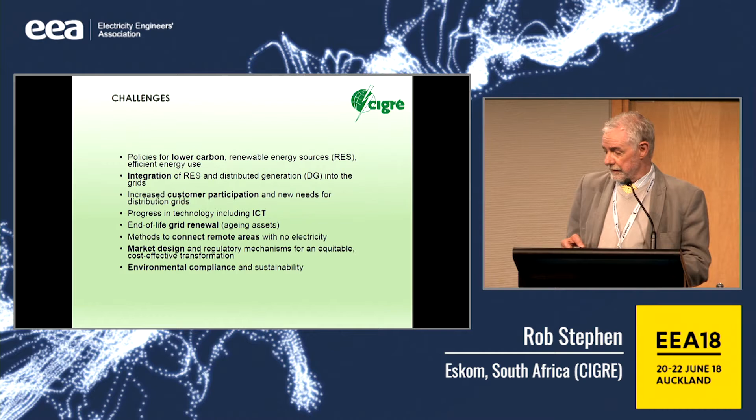And then, of course, market design, which now starts affecting your entire operation of the network, and then your environmental compliance. So, the purpose of the power system: high reliability, security of supply, most economic and best environmental protection. And of course, none of those really go in sync with each other. They're always competing. And this is one of the big challenges, of course, being an engineer, to try and balance all of these together.

There was a study done on what grid models are going to go forward. If you remember, some years back, when renewables were started, they said you don't need transmission lines ever again, because everything's going to be just on your roof, and you're going to be totally off grid. What they found was virtually exactly the opposite, because when you get grid-scale renewable generation, it's normally placed in areas where there's no lines, there's no load, there's nothing. So you then have to have lines coming from there into the load centers.

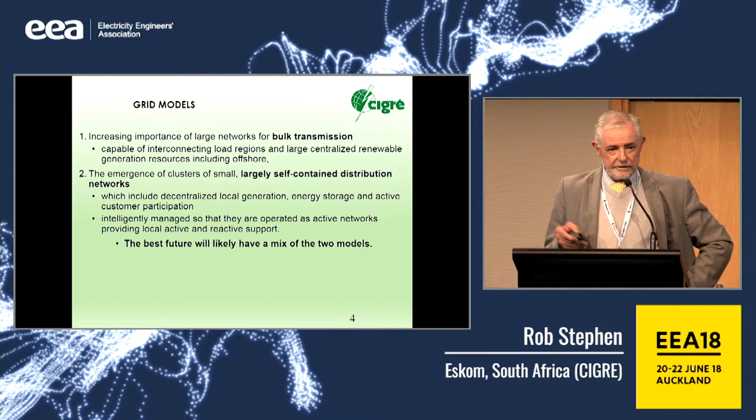So they actually realized that we're still going to need large networks with bulk transmission, but there's also this cluster of small distribution networks, the microgrids. The microgrids can be standalone or they can be part of the grid, with a combination of various levels between how much integration or not. So the finding was that you can't ignore one or the other. You actually have to look at a mix of these two models of grids.

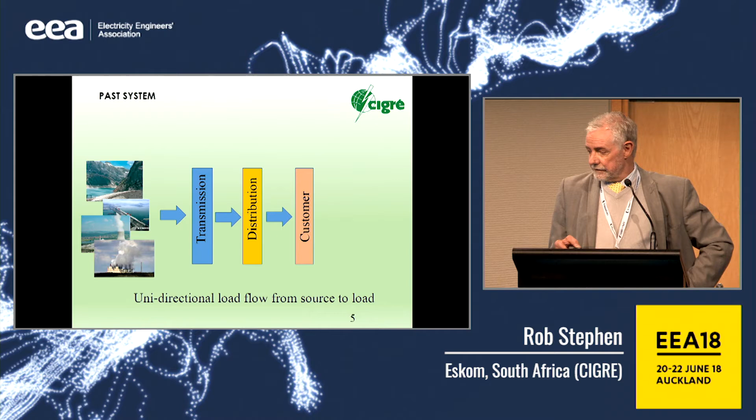So this is really your past system, and in fact most of the world is still operating in this mode to a large extent. But this is really where your evolution comes in, where you've got generation at any point, at any voltage, and power flow in any direction at any time, at any voltage. So now you can have MV feeding back through to your transmission network, and this has been found in Germany with a large rooftop PV program, that you're getting back feeds through the transmission transformer. So now all your tappings, whereas a transformer tap for transmission was normally going only in one direction, now you have to see have you got voltage problems going in the other direction, the power flows in the other direction. It was never really planned for that.

What they've identified in CIGRE is 10 areas which need to be focused on simultaneously, and each of these areas really is integrated, one affects the other.

Your active distribution networks really is what you might term your smart grid. But that leads to, with your smart meters, a massive exchange of information, your big data management. Often big data is actually worse than small data because it's just too much and you make absolutely no use of any of it. The importance of how to actually manage the data, who owns it, who uses it, and what analytics you want to get out of it is extremely important to decide up front.

Then your integration of HVDC and power electronics, with the cost of the inverters coming down, your voltage source converters, your HVDC up to 2000 MVA now, voltage source converters, they've now got a DC breaker as well, they claim, so you can get DC grids, and of course MV and LV DC, which we're looking at.

Then installation of storage, and then the one thing I'll touch a little bit more on is operation and control, and then your protection, of course, and that's your varying fault levels and the need now for wide area protection systems and automated changes of relay settings.

And then new concepts in planning. Planning used to be fairly complex, now it's ridiculously stochastic, so it's almost you don't know where the load is varying, and it changes from a load to a generator. And then, of course, in managing that, you need new tools.

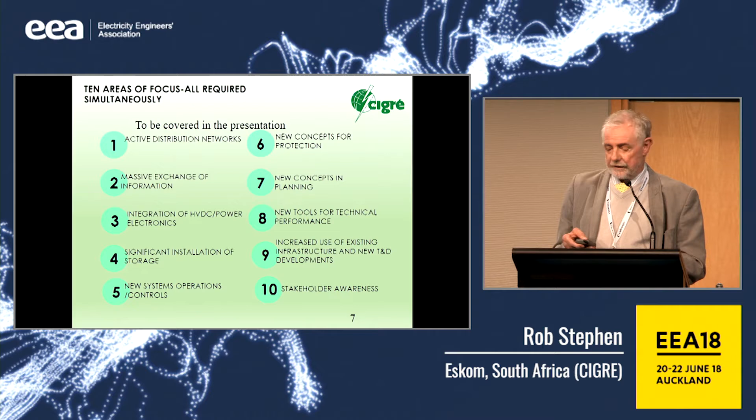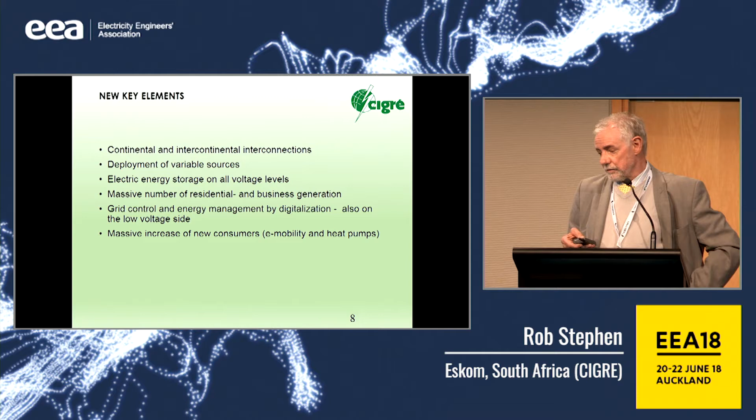Just looking at the new key elements that are coming in: continental and intercontinental connections, deployment of variable sources, your energy storage at all voltage levels, residential and business generation, and of course your increase in new consumers, e-mobility, heat pumps, and so on.

And really, as you know, your inverter-based resources - and while we call them inverter-based and not renewables, hydro is renewable, but it's not inverter-based. So you have a totally different problem with your inverter-based resources than you would have with your synchronous renewable resources.

But you can see the increase there just in China, going up to, within the next couple of years, over 150 gigawatts of PV. So it's a really, really huge amount of growing resources.

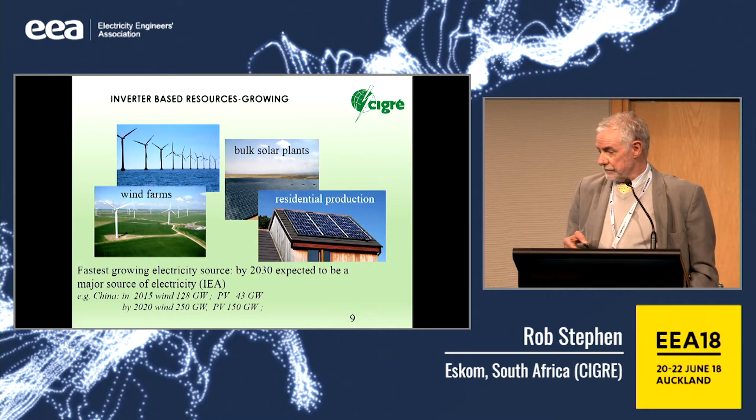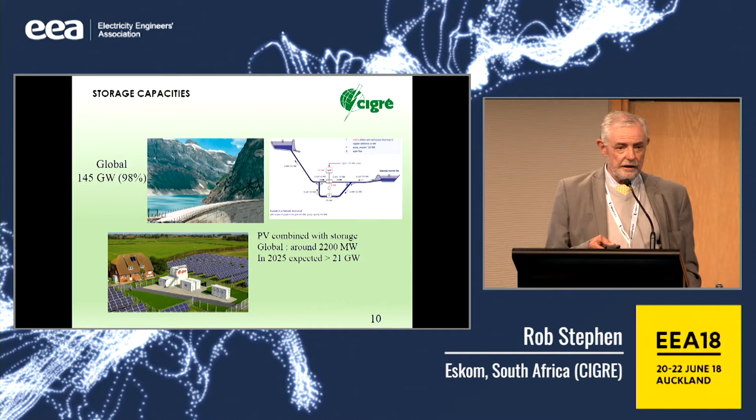At the moment, about 98% of storage is pump storage. It's not batteries at all. However, if you look at PV combined with storage, you can expect around 21 gigawatts coming online in the next sort of 7 years.

Just to get a little bit onto your system operations and control, as when you start getting your inverter-based resources, there's quite a lot of challenges that you have, and these are power balancing, congestion management, active reactive reserve, and risk management and probabilistic approaches which are needed to actually manage your operations.

And I think in New Zealand you're fairly blessed in having the large hydro, whereas in many other countries it's really an old coal-based system, and most of the generators around the world are in fact still coal generators. And they might say they're phasing them out or doing something, but there's actually still an enormous amount of coal generation going on.

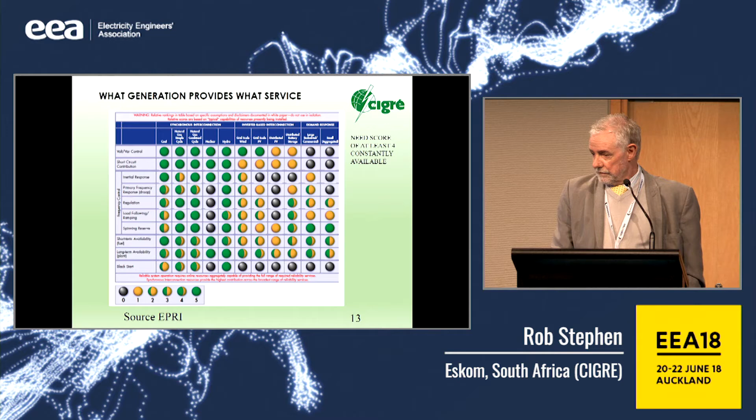This is a concept now raised, because of this problem, by China State Grid, and they've set up a group called the Global Energy Interconnection. They've now done some really serious studies to look at if they put terawatt-sized renewable stations around the world, the argument being that somewhere around the world the wind will be blowing and the sun will be shining. So if you can get the power to come from one side to the other, you could most probably have a renewable base with enough inertia from your hydros to supply.

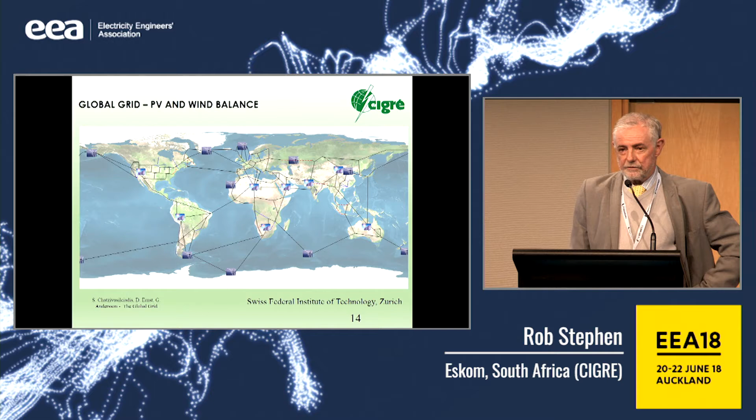They're looking at about 4,500 kilometer lines, 10 gigawatt transformation, and they're looking at AC and DC coming in with a few thousand, with really large stations. But if you look at China, they're putting in 40 gigawatts of generation per year. So this is perhaps nothing too much for them anyway.

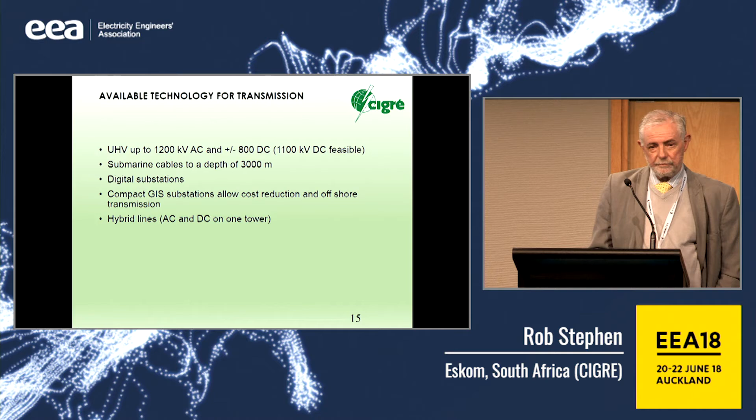Looking at that available technology, we've now got UHV up to 1200 kV AC, and they're starting to build 1100 kV DC. The big thing is submarine cables can now go to 3,000 meters, which means that you can now use cables to get across very deep chasms between continents. Digital substations, of course, compact GIS, to put really big wind turbines on, and they're developing a 20 megawatt wind turbine now, 250 meter diameter. And then, of course, hybrid lines, AC and DC.

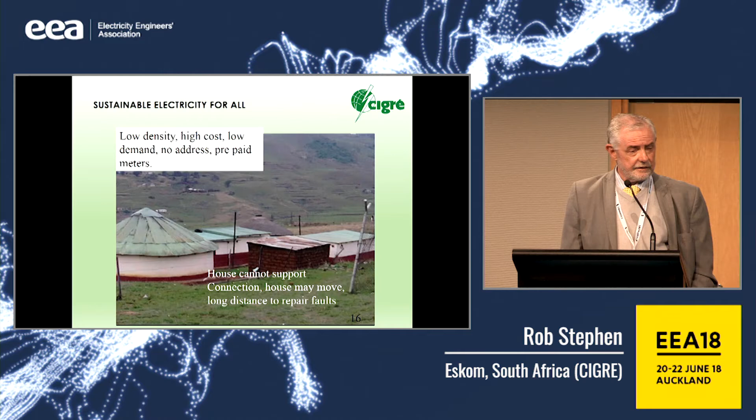You bring your connection, it pulls the wall down. The house may move, and you often go there and find that all that's left of the house is your meter. Everything else is gone, there's not even the house there. So these are the challenges that you actually have to face. And if you put a microgrid there, you're still going to have to run 900 meter LV lines to try and get to these houses. So that's quite a challenge.

Just to then get on to something a little bit more technical now.

This is item number 9. Because of power flow and churn, there's a need to really look at how to operate existing lines and replace old conductors with high temperature conductors. You can retension existing conductors, upgrade the voltage level, use real-time thermal rate monitoring, etc. I'll cover use of high temperature low sag (HTLS) conductors and real-time monitoring.

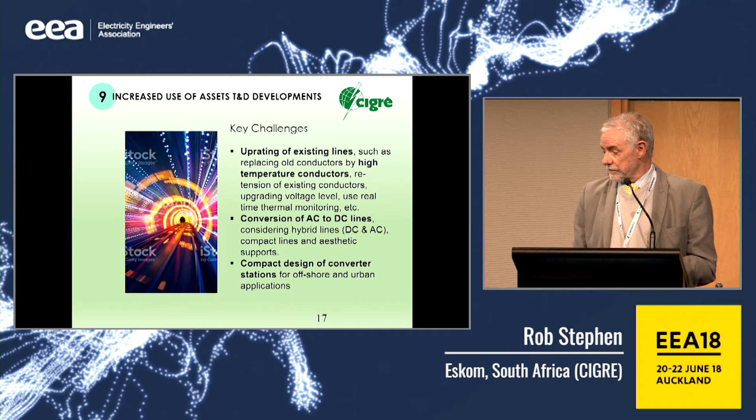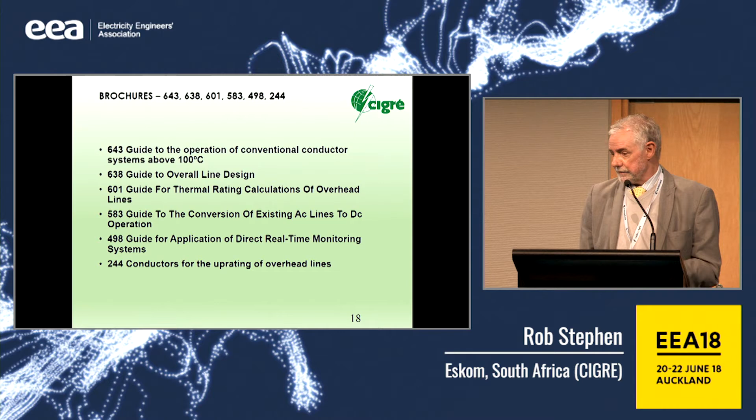Having a look at this, the thermal rating of a line - if you need a certain amount of power, say 1,000 amps, you can do it many different ways on a transmission line. You could use an 800 millimeter conductor and run it at about 70 degrees C, or use a 400 millimeter conductor at 100 degrees C, or use a 200 millimeter conductor at 200 degrees C.

So the big thing is, say you want to operate a line that currently has a 400 mil conductor, but you need to increase the current down that line without changing your right-of-way and without changing the towers - you need to increase the current by, say, 2 to 3 times. How do you actually go about doing that? That's where high-temperature, low-sag conductors come in.

Now there's many, many types, and if you're from a utility you've most probably been visited by one or two manufacturers telling you their conductor's the best thing since sliced bread, the only one you should really use. Well, it might be the case, but you need to know what you're doing when you actually start selecting a particular conductor for your particular application. That's what I want to cover a little bit.

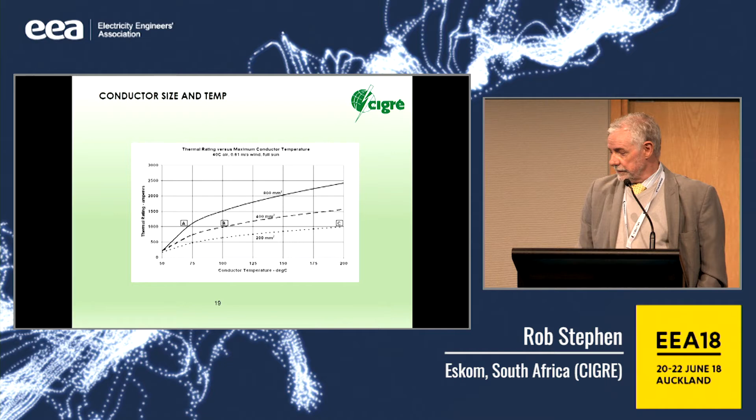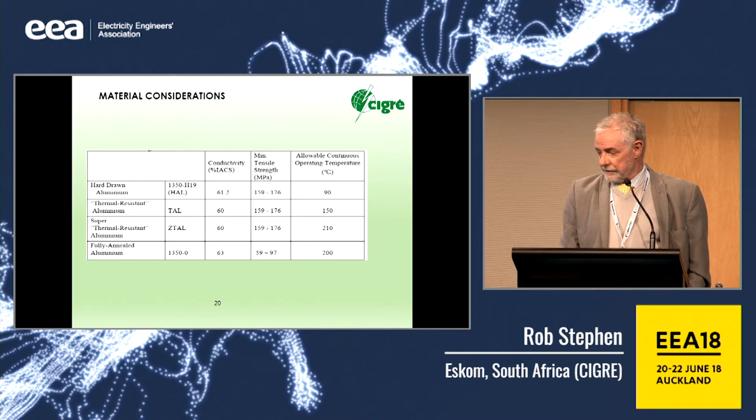For a start, you can look at the different kinds of materials. There's hard drawn, which is our normal aluminium that we normally put up. Then you get thermal resistant, which is TAL, and super thermal resistant, which goes up to 210 degrees, which is Z-TAL. These are just a few examples - there's about 10 different types of these alloys, all going up to various temperatures. And the interesting one is also fully annealed aluminium, which came out in the 60s, which goes up to 200 degrees C.

So depending on what kind of material you want to put on the outside of the conductor, what are you going to put on the inside? You've got galvanized steel, extra high strength, aluminium clad steels, mischmetal - which is used quite extensively because it's very corrosive protection and it goes up to high temperatures. And then your galvanized invar, meaning invariable, so it doesn't vary with temperature, so your sag doesn't vary with temperature. And then, of course, there's a range of metal matrix materials, polymers, and carbon core conductors.

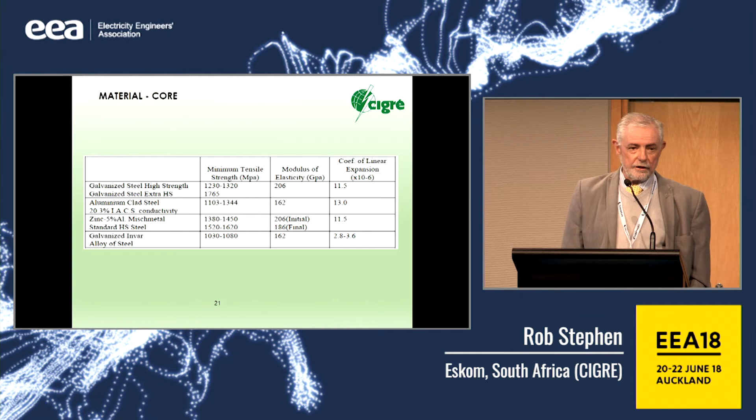So these are the types of things. You can also choose different strandings - a trapezoidal strand, a round strand, a Z strand, and you can see there's a polymer carbon composite core on the lower left. There's also single cores, that's a single strand core, or a multiple strand core. So there's a number of these you can choose from.

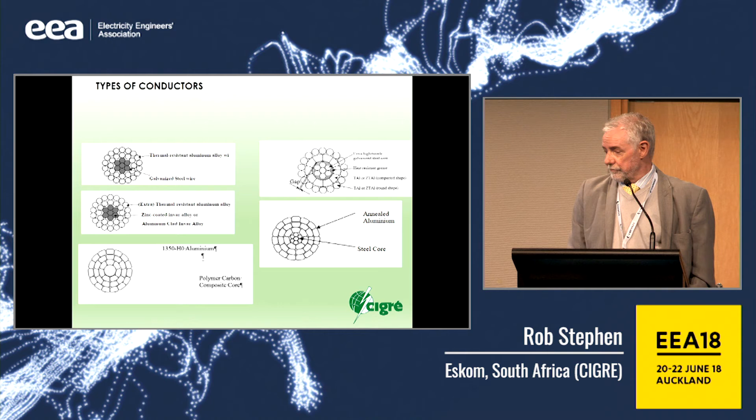And then you can see on the top right there's a gapped conductor. You might ask why you put a gap in between the core and the aluminium. So there's a lot of these that you can choose from, and they all vary in price, and it depends on how you want to apply them.

So looking at the selection - say you've got a line, and your original line was sagged to the dotted line, but you've got a 2 meter buffer that the surveyors at the time allowed. So you've got a maximum sag there of about 13.5 meters. And say you now need to go from your 50 degrees C or 75 degrees C, which is the little dotted line, across to your, say, 150 to 200 degrees C.

What conductor do you actually choose? The important thing here is to really look at your knee points. You can see that the blue line has a very high knee point, and even though the core is invar core, as soon as it hits a knee point, it means all the load that's on the aluminium goes into the core. So now the core is supporting your entire conductor, and the aluminium's not supporting it at all.

The earlier you have that, the flatter the temperature sag curve becomes. So depending on what you really need and what temperature you need to go to, you might then decide which conductor to use. Interestingly, the blue line is most probably not going to be suitable for you because it hits your maximum sag at around 110 degrees C. Even though that conductor can go up to 200 degrees C, it's not going to help you.

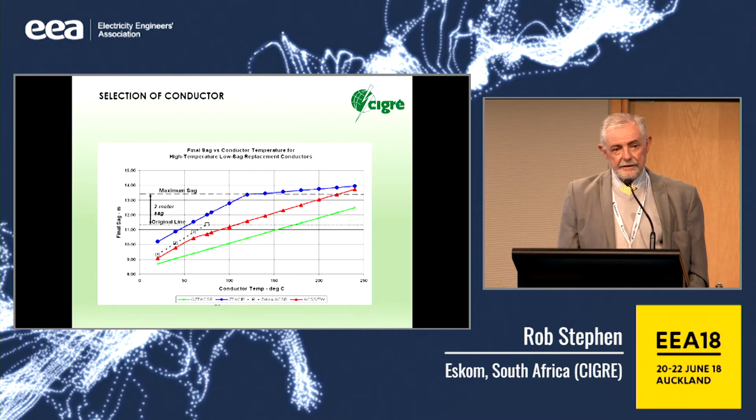You don't need to change your towers. You don't need to change really anything else. And you can then increase your rating of the line quite substantially. This is a case in Spain where they needed to go from 370 amps to 1500 amps on a particular line. These are all the different types of conductors.

The black is an ACSR, their normal one. The blue is the GZT, which is gapped. Then you can see the red is an ACCR, which is a metal matrix conductor. Your ACCC is a carbon core conductor, and your ACSS is the aluminium conductor, steel supported. And they eventually chose a GZ.

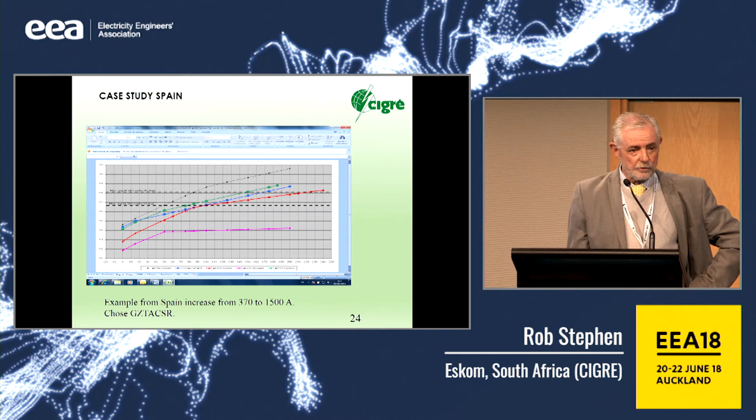Mainly it was availability reasons and cost reasons. This is a very complicated conductor, so you normally only can do it from strain to strain. You can't put a mid-span joint in this thing. But on ACSS you can - you can put, and on the polymers you can put mid-span joints. So you need to be careful about that as well. But there's an example where you can go up about 4 times without really changing much on your particular conductor.

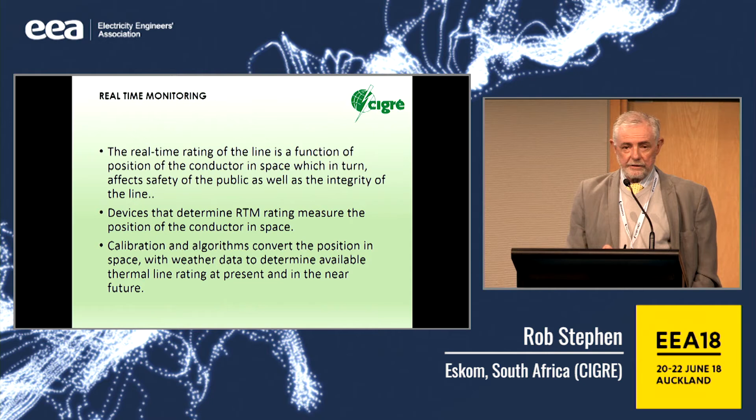Particular tower configuration. I'd now like to touch really briefly on real-time monitoring. If you've got a line and you need to find out how you can actually run this line, normally the rating of the line is determined by static considerations - wind speed, solar radiation, wind direction, and so on. But you can, especially on a day like today, most probably get a lot more out of your line because it's running cold, because you've got wind and you've got rain, so it's really been cooled.

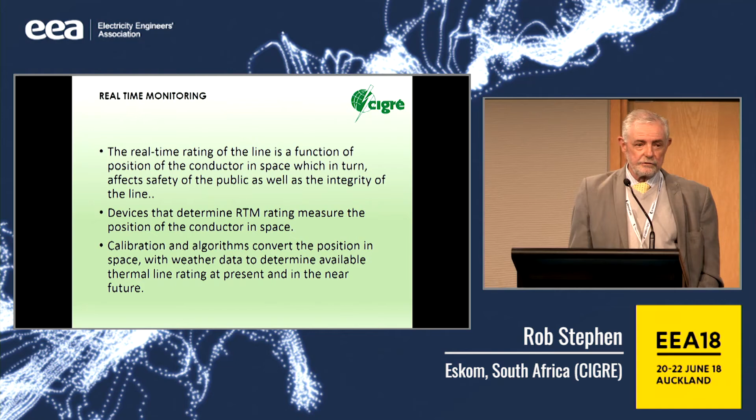So the real-time rating is a function of the position of conductor in space. Really what we're doing is monitoring where this particular conductor is in space at any one time. We're then using weather data and algorithms to say, well, if it's at that position, how much current can I push down the line in the next hour to get it to the design temperature? And that's really where you use your real-time monitoring.

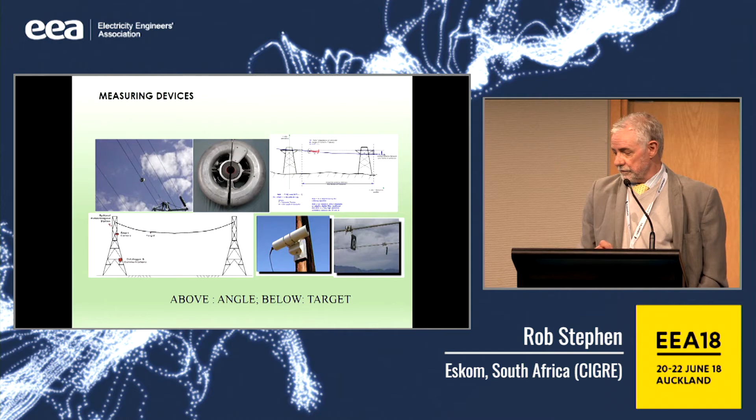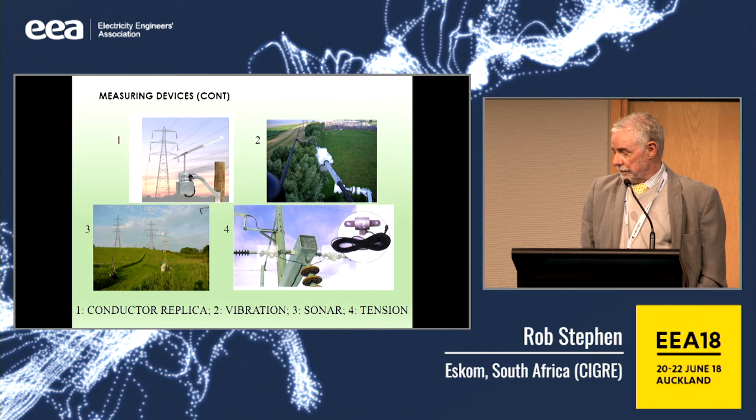These are the measurement devices, and there are many of them. One is an angle, the other one looks at a target just to determine where it is. There are different ways of determining the actual effective wind speed and how you then determine the rating going into the future.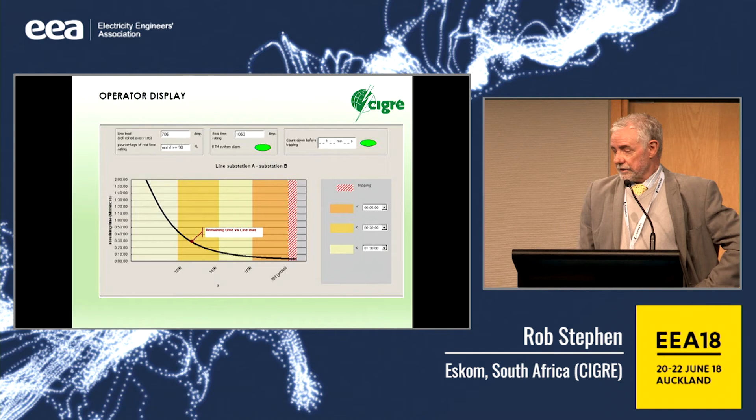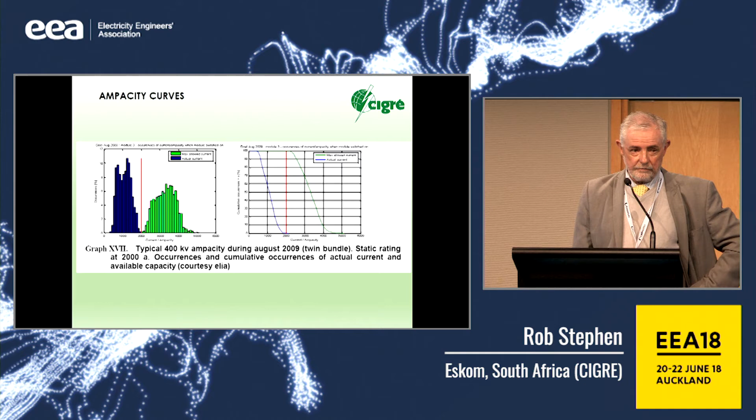But if necessary, in this case, you could have actually increased it quite a lot above the rating without increasing your temperature above the design temperature.

Looking at actual case studies, what they found in CEMIG in Brazil: a delay in construction, delay in strengthening of a 138 kV line, and renewable generation.

One of the nice things about renewable generation is that if you've got fairly big wind farms, although the wind speed at the wind generator isn't the same as on your line, generally if you've got a really high wind speed at the wind generator, your line wind speed is normally above 1 meter per second or 1.5.

So you may be able to, using real-time monitoring, increase your line rating, and you don't have to curtail the particular generation from the wind farm.

Also, if you design with perhaps a high temperature conductor, you can get a very high thermal rating on that particular line at a fairly low cost.

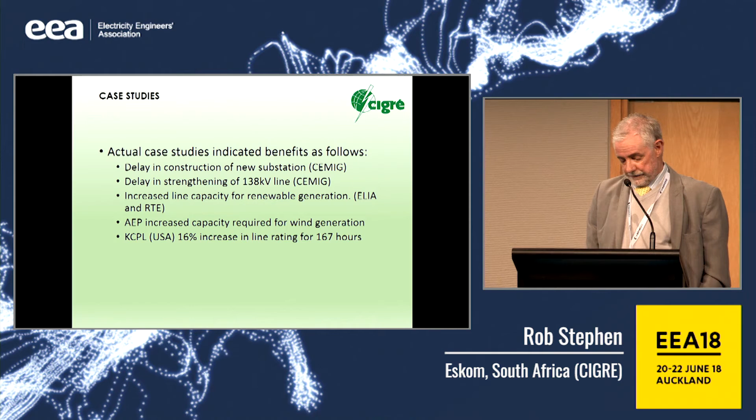So AEP in the US, they can increase capacity required for wind generation. That's an example. And then KCPL, a 16% increase in line ratings for 167 hours. This is a finding from AEP.

The black line is really your rating, so that's what they would operate at. The blue line is the minimum. Really that is a minimum rating based on the weather that they had.

So you can see there the additional capacity as the green bar, going from the black line to the blue line, and the green is the average. So even if you take the minimum, you still get quite a bit of increase.

But just beware, if your line temperatures are fairly low, around about 50 degrees C, you might not get this. Especially on a hot day, you might actually find that you've only got about 1 or 2 degrees to play with, so it might give you less than your rating. So that's also something to consider.

If your temperatures are 100 degrees C like they are in the States, or 80, 100, 120 degrees C, you can then increase that. Your real-time rating systems can then come into play with a lot more benefit to you. So this is not generic, that's what I'm saying - it depends on your particular conditions.

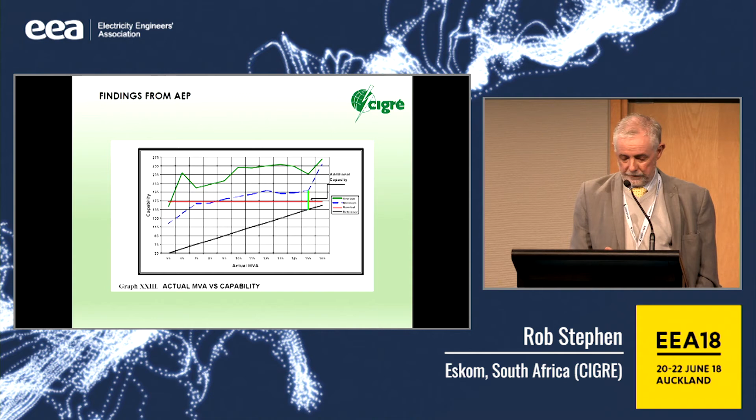Looking at the benefits, you allow more time for operators to make decisions, because now he doesn't have to shed load immediately as soon as he hits that rating. He can actually say, well, look, have I got time? Is the wind blowing? What's the story?

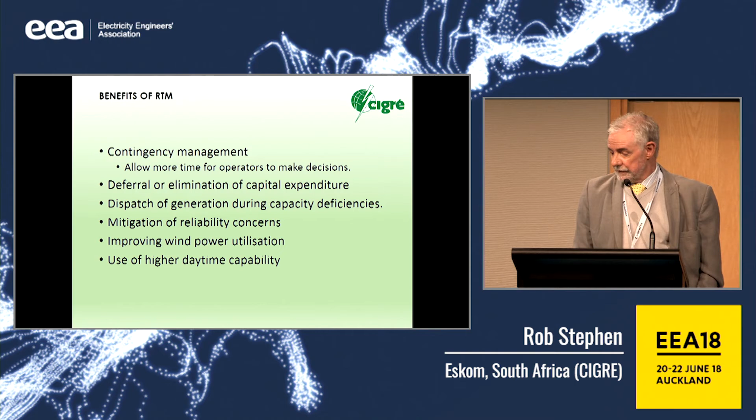You can defer capital expenditure. You can dispatch generation during capacity deficiencies. It also mitigates your reliability concerns. And you might get improved wind power utilization, so you don't get curtailment, and use a higher daytime capability.

So really the real-time systems ensure the line won't contravene the statutory or annealing limits. But it doesn't allow, you say, well, real-time, we're going to run the line hotter. It might be running hotter than it would otherwise have run if you just use your static rating, but it won't run hotter than your design temperature.

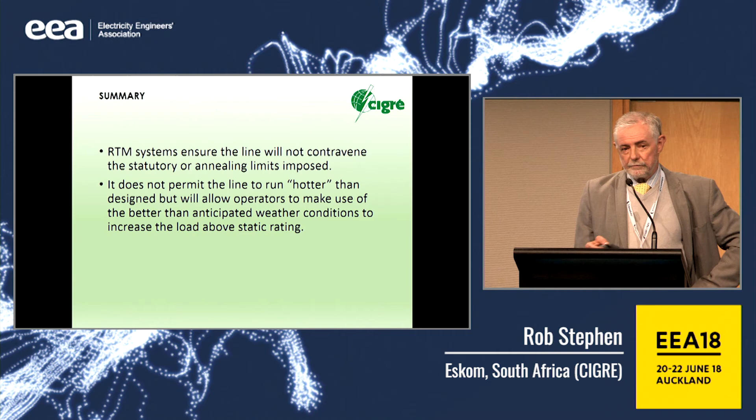So if you don't have it really, you don't really know where you're sitting. You might actually be running hotter than your design temperature at the moment anyway, but you most probably wouldn't be aware of it. So the real-time systems actually enable you to manage your load within that particular design criteria.

So just in conclusion, I think looking around, the inverter-based resource penetration is going to continue to accelerate, whether you like it or not. The fact that the costs are coming down and it's free fuel, it just makes investment sense. A big thing: loads and generators are going to become interchangeable, mobile, and variable, and how you actually manage that.

I think a lot of papers here at this conference have actually indicated there are systems and they're looking at ways of doing that.

Your flow of power is going to be uncertain. And as I said, where you thought power always went from transmission through to distribution, it's going the other way now. It goes away, it comes back in a stochastic way, just where you don't want it or just when you don't need it. So it's really going to be uncertain.

The other thing is that markets are going to continue to distort the power and the revenue flow. And the introduction of blockchain, well, we don't know how that's going to affect markets. So we've got not only technical aspects coming in with generation, but man-made rules also playing a huge role in how your network behaves and operates.

There's going to be requirements for more flexible and robust networks. In other words, you're going to have to design networks that you don't have to run out and change everything all the time. So these could be smart networks where they automatically change settings.